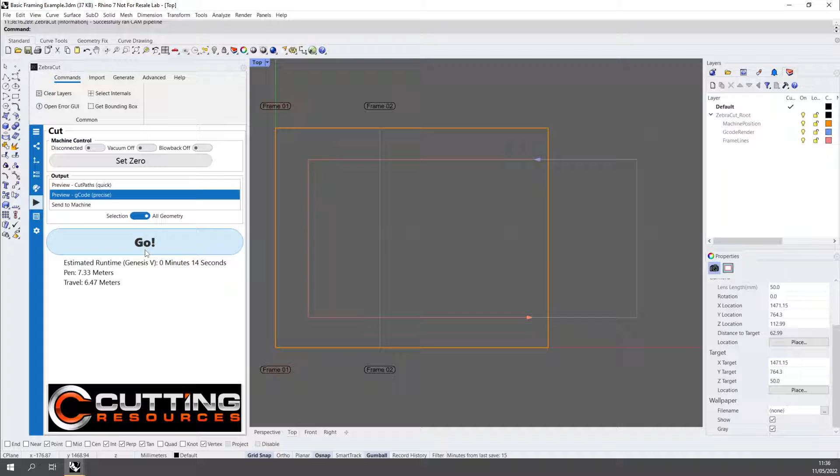And in this case, I'm trying to cut one rectangle, which you can clearly see is larger than the size of my machine. So we're going to have to frame. If we run a preview of this job in ZebraCut, we will see how Zebra would like to frame this. So we can see ZebraCut would like to do two frames, frame 1 and frame 2.

And you can see that Zebra has color-coded the parts to be cut on each frame. So for example, on frame 1, we're going to cut this C-shaped part of the rectangle. Then we're going to frame as far as frame 2, and then we will cut this side as well. So our rectangle will be cut in two passes because it's too big to fit within our machine bed.

Now it's important to say there is an overlap between these two C shapes that are being cut on different frames, and that overlap is in order to ensure you get a clean cut in case there is any inaccuracy introduced during the framing process. On a conveyorized machine, that error would be very small, but if you're doing manual framing, it is easy to distort or stretch the material, and so we introduce these overlaps to ensure you get a clean cut.

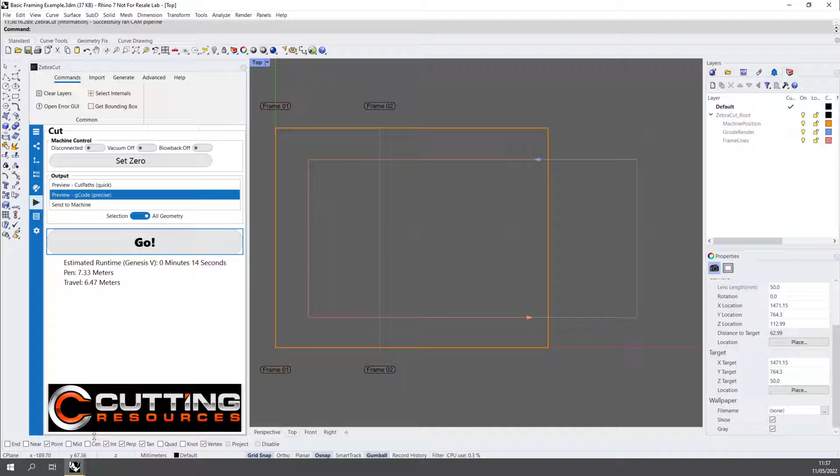Now, let me show you a more complex example. So we will run this framing example here. I've got several parts here, and I'm just going to run again a preview of those. And you'll see we have indeed 7 frames for these various shapes. So again, we have our rectangle getting cut in two halves.

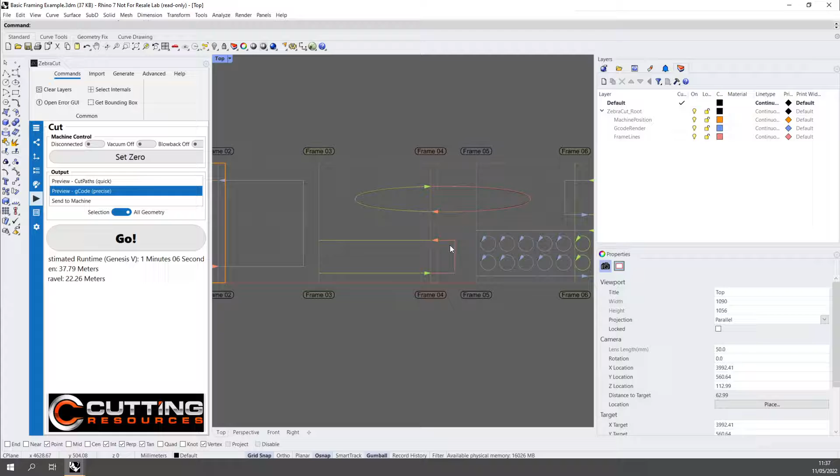Then we have frame 3 in green, and that's going to cut the first part of this ellipse and the first part of this rectangle. Frame 4 will complete those two shapes. Frame 5 will then start this shape here with the internals. Frame 6 will complete that. You can see this rectangle here is spread over 3 different frames, and finally this ellipse is cut in 2 frames.

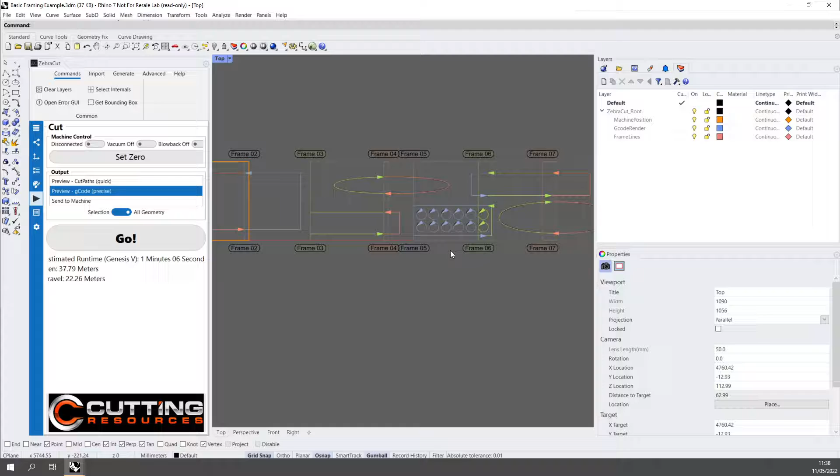The goal of intelligent framing is to try to avoid cutting parts unnecessarily, so avoiding spreading parts over different frames unnecessarily. So we're trying to minimize the number of parts which are cut into multiple frames, and to do so with the minimum possible number of frames.

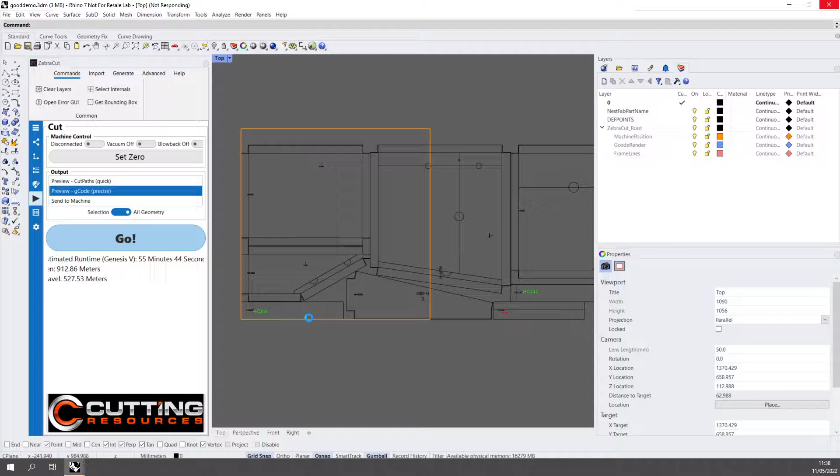Now clearly the framing can become very complex. Let me show you a much larger and longer roll of material to be cut. You can see there are many parts that are well nested here with many internals as well, pen marking and creases and so forth to be done. We'll let this one run, and you'll see it will produce a nice complex framing arrangement for us, which again is trying to minimize the number of parts which are crossing frames.

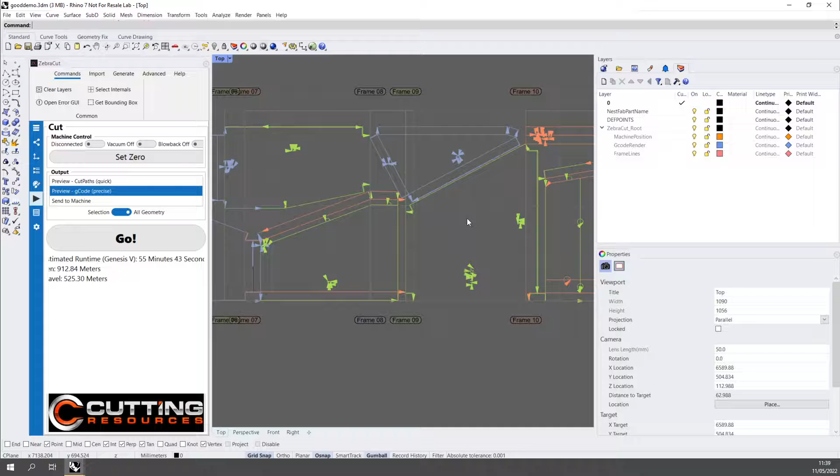So you see, for example, on frame 1 this part is cut entirely, on frame 2 these parts are cut entirely, and you'll see no part is actually cut into multiple pieces. So that is intelligent framing. It is a very helpful algorithm, but you will see there is quite a lot of complexity to it as well. In ZebraCut, you have a lot of control over that complexity, and this video series will teach you how to control that complexity.

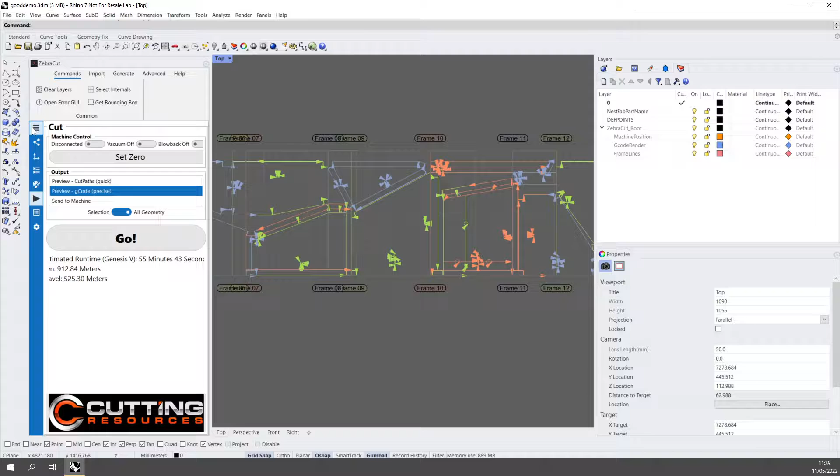All of the framing options are controlled through the job config system in ZebraCut, so you can go to job config on the menu, and then you will see there are multiple configurations that refer to framing, and this video series will talk you through these various options.